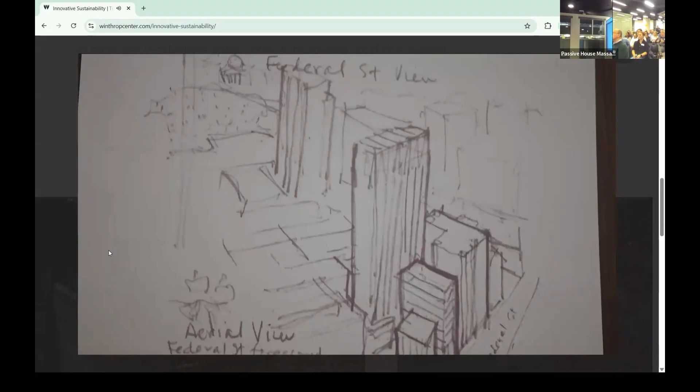Climate change and the global pandemic have made this absolutely imperative. But long before 2020, Millennium Partners was already at work, imagining a new kind of building that would show the world that it was possible to exceed LEED Platinum, to use green energy, and be carbon neutral. We believed the most impactful place to start was to use less energy in the first place. That was our North Star moving forward.

As innovation leaders, we knew it wasn't just the right thing to do. We saw an opportunity to partner with our tenants to help them achieve their own ambitious climate goals in ways that other landlords couldn't. We could provide a literal blueprint for net zero office operations.

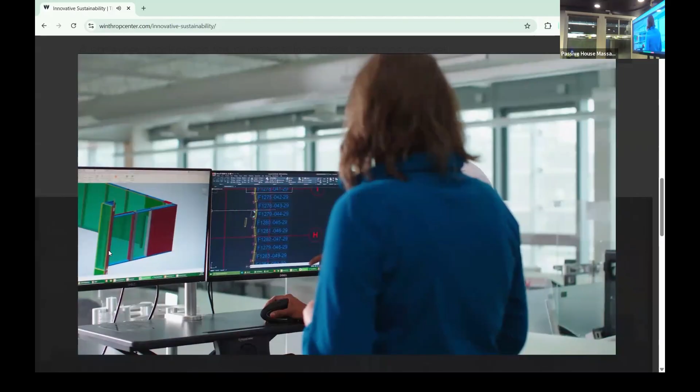The Millennium Partners team went to work. We challenged each other and our partners, including professors at MIT and the global manufacturing sector, to think beyond and deliver a new kind of solution that would be groundbreaking today, yet still innovative 10 years from now.

What rose to the top was the Passive House Standard, a rigorous standard established more than 25 years ago by the Passive House Institute in Darmstadt, Germany, for use in residential homes. The catch? It had not been applied to large office buildings, especially an 800,000 square foot building like Winthrop Center.

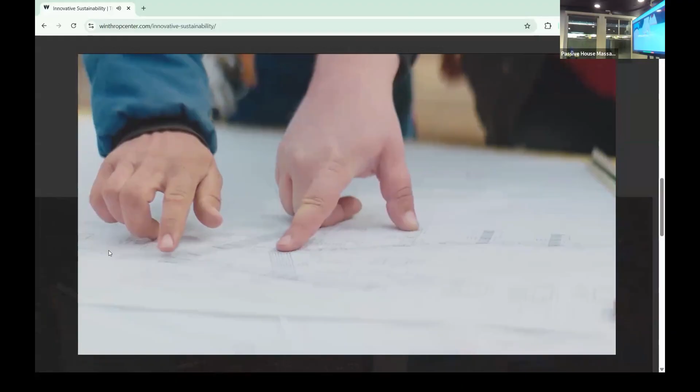After initial skepticism and many meetings, our partners at the Passive House Institute fully and enthusiastically committed to helping us implement the Passive House Standard to achieve the uncompromising performance and dramatic energy savings we were after, to help us become the largest passive house office building on Earth.

Two years into the planning and modeling process, we had our path forward. First, we needed to invent a new kind of curtain wall, one that had never been made. We challenged the industry to deliver an unheard of level of insulation and air tightness.

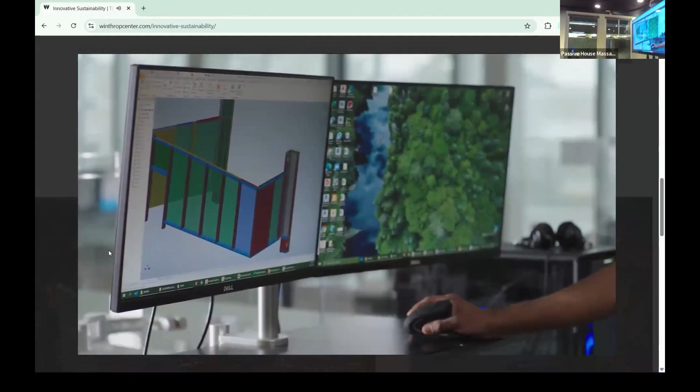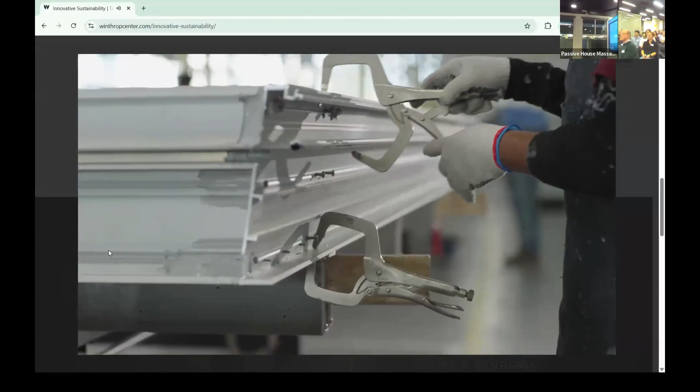The northern Boston climate would make this very difficult. We'd have to eliminate thermal bridging and reimagine the windows using triple glazing. In the end, we created an entirely new curtain wall that could be used by us as well as sustainable buildings of the future to set a new standard of air tightness.

Next, we looked at how Passive House could improve workplace thermal comfort and wellness. Human body heat plays a role in the heating and cooling of the building, as do the individual neighborhoods inherent in our T-shaped design, which can be powered up or down.

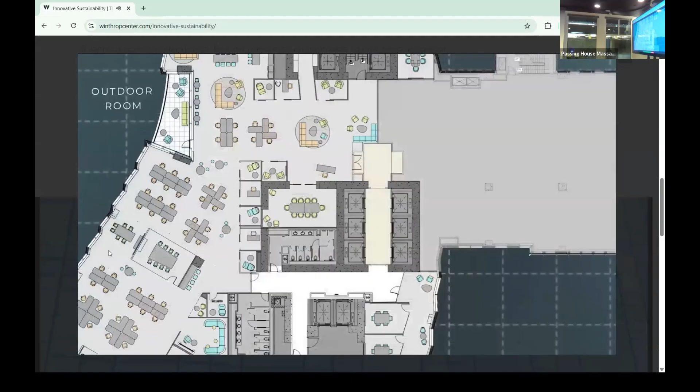We determined that no workstation should be more than 35 feet from a window, and all fresh air outside terraces should be accessible from every floor. For the physical and mental health of Winthrop's inhabitants, we wouldn't compromise.

Winthrop Center's one-of-a-kind passive house ventilation system provides unmatched thermal comfort and energy savings. Unlike typical buildings, this system provides a continuous supply of fresh air, which enhances creativity and productivity, creates a healthier environment, and integrates holistically into the occupants' daily lives.

It's one thing to write articles about it, and it's one thing to teach about it. It's one thing for government to put standards in place, but when people actually start to do this stuff in practice, and we see the model, and we know that it can work, that's what really makes the difference.

You've just shown the whole world that we can do this. A plan, years in the making, from the only company bold and inventive enough to do it.

Winthrop Center has made believers out of everyone, especially city and state leaders eager to forge a new path to a more sustainable future. But particularly with this building and the history of what it meant to add to the downtown skyline, to work your way through many, many years of process, and to be way ahead of the curve in sustainability and ensuring that you've created a monument, an example to the very standards that have since caught up to where this building is.

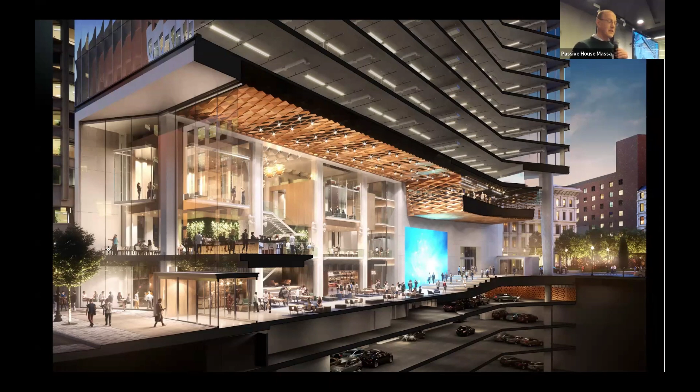This is a cutout, this is a view of the connector from the Federal Street side. And it kind of gives you a vantage point. I don't know, how many people in the room here have been in Winthrop Center?

Okay, well, you know, I was talking to Beth, Alexander, and some of the other board members. One thing we will be doing - I'm sure at some point in this presentation the font I have up here is going to be too small and you're not going to be able to read it. So we will be having a tour or two in the next couple months. If you've been on the tour previously and the building was a little bit under construction, you're welcome to come back, and we hope that everyone will join us.

Another view of the connector with a restaurant on the mezzanine level underneath the Chihuly.

Okay, so a little bit of story time, which I think is part of my number one lesson at Millennium - working on Winthrop Center, delivering Passive House.

2016, we were awarded the project, but it started before then, because it started with some charrettes. Millennium Partners, historically, we have run as a family.

Handel Architects has designed every one of Chris Jeffries' buildings. DeSimone, the same builders. So what that means is Chris, Phil, Rich, Mario, Kathy, Joe, all the partners put their heads together and said, okay, Winthrop Center is a design competition. It's a development competition - we're competing with other developers for this site.

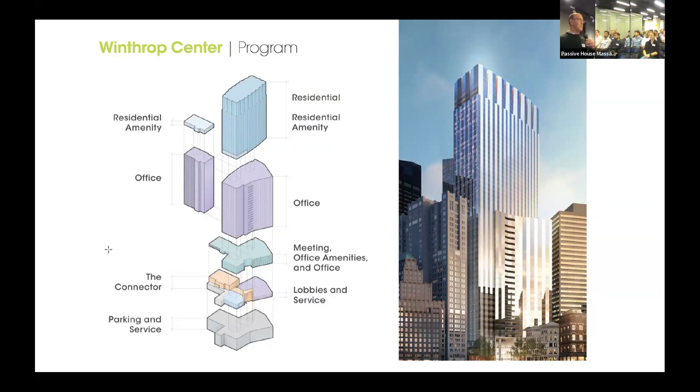So I think there's a little bit of pragmatism in all of this. Striving to create something next generation, but being practical about it. And that's kind of where we found ourselves.

So the trip to Germany for me in that fall of 2018 was eye-opening. Meeting with the founders of the Passive House Institute, meeting with the staff, explaining what we were doing and what we were about. It kind of helped lay a groundwork for the creation of the pilot project, which is the Passive House office at Winthrop Center.

So, new global standard. If you go on our website, we talk about the world's first 5-star office building. I mean, it's good marketing. It sells, and we'll talk a little bit about how it has translated to the users themselves. Because let's remember, what are buildings if not for people, right?

800,000 square feet, we saw that we were going to have 3,000 to 4,000 people coming through that office space every day. So to be able to positively impact those people and convince those tenants that they should come to Winthrop Center, that was our single greatest challenge to start. In addition to all the technical challenges, the building, the teaching, right? The questions you get asked, where's the Passive House specification? Well, it's a performance standard, right? Sure, the specifications have some Passive House elements, but it's embedded and integrated into everything that you do.

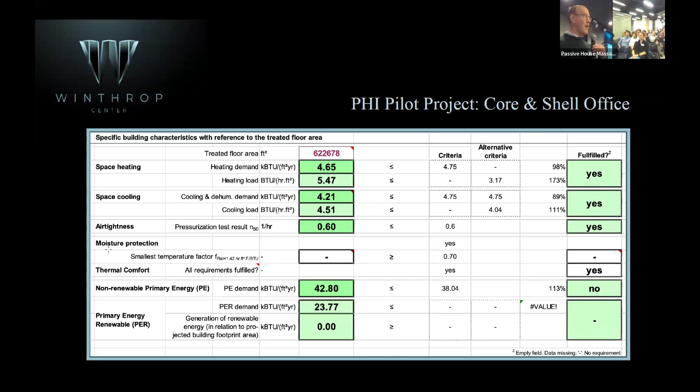So the site is constrained, which creates some logistical challenges for building. And so the solution through a one-year process of design assist with Suffolk, Sotawall, Karas and Karas, Socotec, Vidaris, Handel was a unitized curtain wall system out of Canada. And where we landed through all of that, Spandrel.

R18, the vision glass U value of 0.22.

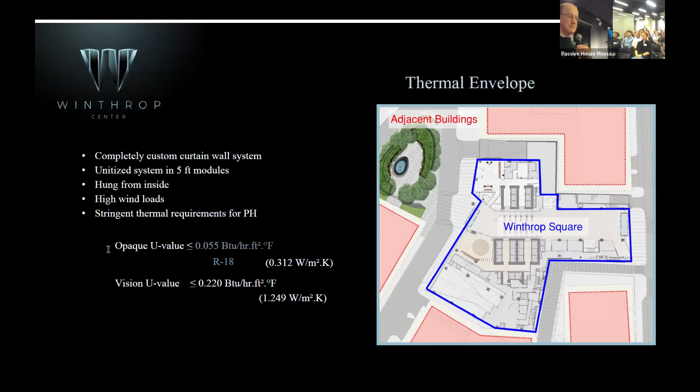Completely hung from the inside, they created a trolley system - I don't think I have any pictures of it in here - that allowed the windows and the window system to be picked from the inside, because crane usage was too valuable to creating the superstructure.

So from a developer's standpoint, getting to the endpoint and delivering schedule is first and foremost much more important and more valuable. So if you can come up with an alternate way of installing the facade, you would do it.

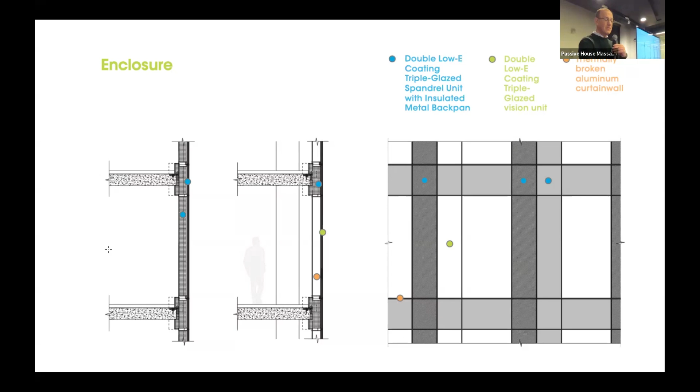So this kind of shows you some of the key points: the thermally broken curtain wall, triple glazing, double Low-E coating on the glazed vision unit, 10-inch deep system. The triple glazing was 3/8, quarter, 2 layers of Low-E coating, argon filled.

You'll see in some of the photos the mineral wool at the head and at the sill.

It's funny. So this project, from a technical standpoint, we ran it really with 3 distinct teams. We had a residential team, and they were fighting for the residential layout. We had an office team who was fighting for the office layout. 5-foot modules, distance from the core to the facade - all of those things were in tension.

Chris Jeffries, the founder of Millennium Partners, when he personally is laying out residential units, which he was on this project because this is a $1.35 billion project, and if he said, I want to make some changes in a residential unit, well, Chris gets to do that. And the rest of us have to figure out a way.

So all of those things were in tension. I mentioned Steve kind of being at the middle of it, and then Scott eventually joining the team and helping us navigate those waters.

The office side, this idea of passive house and vision glass, that was the topic quite a bit. Vision glass - how much vision? And we would throw around numbers, right? Because you model numbers, like 45, 50%.

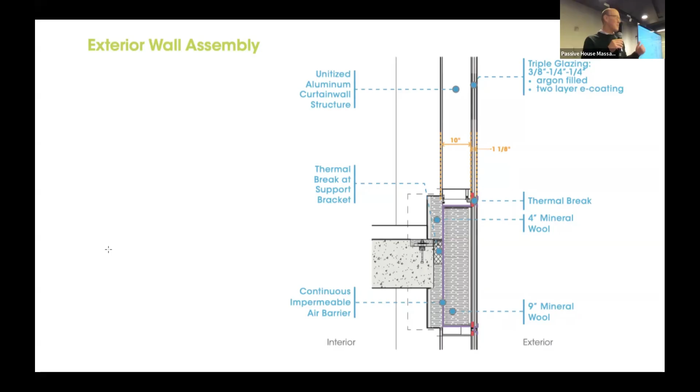But the mid-block site allowed for opportunities to maximize views. And we'll get to that in a second. But one thing I didn't mention...

So this fabricator's up in Canada, and it just reminds me that we tested this curtain wall, and then March of 2020 happened. Well, we're in the middle of building our superstructure, in the middle of testing and fabricating some of our curtain wall north of the border. Well, we know what happened in March of 2020 - border shut down, pandemic hit, and guess what?

We lost our construction financing. $765 million. April 6th, 2020, it was supposed to close. Hey, it's life in the big city.

And so we kind of went back at it in search of financing, and many months later in the fall, it closed. The project changed. The cost of money was different.

So I think when I talk about pragmatism, these are some of the practical things that on the development side that are risks, and we're aware of them. I don't think any of us foresaw a pandemic. But that pandemic created many challenges. Once that financing was in place, we were in it, and we were all about overcoming those challenges collectively.

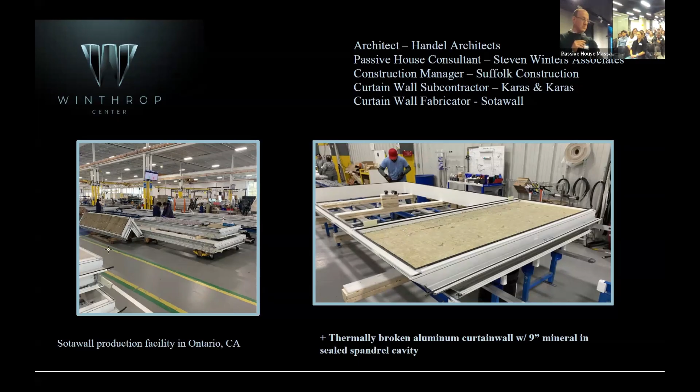So this is a picture of their facility. This gives you a little bit - can you see that on the screen? Yeah, okay - solar heat gain coefficients, U values.

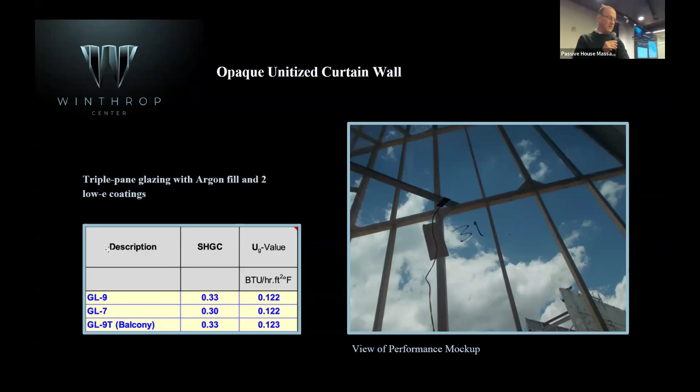That's at balcony. We have a terrace on every office floor. It's a conscious decision that we made because it's overlooking Winthrop Square Park to kind of connect people with nature.

At the head and sill around the entire perimeter, 1,000 feet of perimeter on this project, we have 4-inch thick mineral wool to help us meet our energy targets. We were concerned that would be an issue for tenants, but it actually, in hindsight, hasn't been at all.

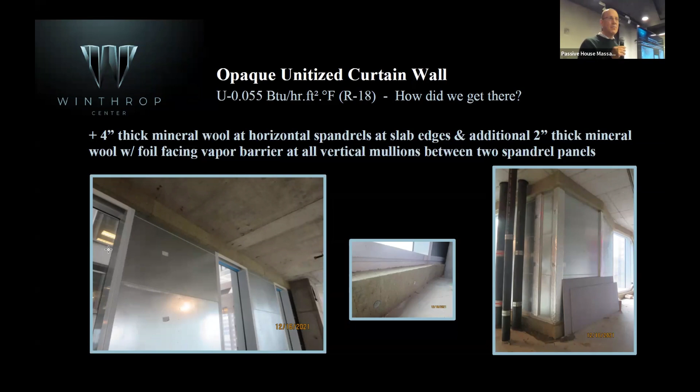You just rock over it, it becomes part of the program. This gives us, here we go, a picture of the trolley on the left, and them hanging the big panel on the right. We were on a 2-week cycle, so every 2 weeks we turn over a floor and move up to the next floor. We have about maybe 20 to 40 panels being hung every day.

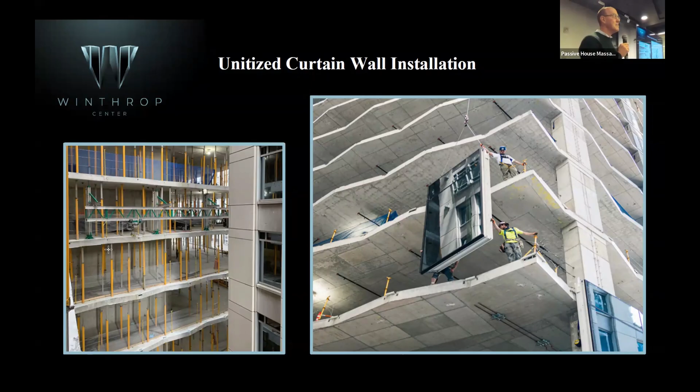So now we get to the testing. The boundary for the Passive House office, the 800,000 square feet, is within the confines of the office itself. So the lowest office floor is the floor, the upmost office floor/mechanical is basically the ceiling, and the facade is the side.

So then we had challenges that we had to review with PHI. We need to build the building, and we have a tower crane smack dab in the middle of our concrete. We have man and material hoists, we have 2 tower cranes, and 2 man and material hoists. So how do you test? How do you seal around those? How often are you testing? So we developed protocols for all of that.

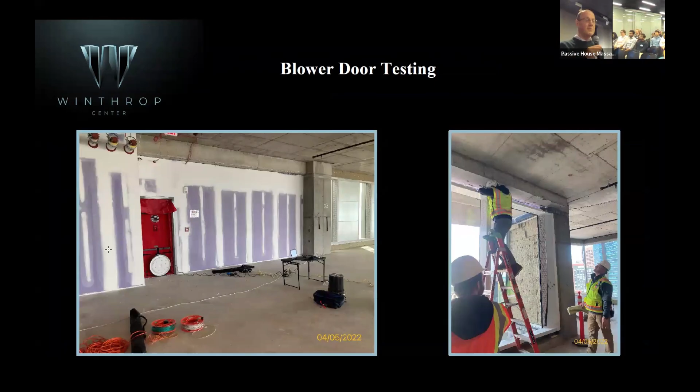So the blower door testing, the picture on the right there, I included because we were testing - it's kind of funny thinking about this. We've been building these buildings for how many years, and only through this are we actually testing the building. It's just something that hasn't been part of it - many of you have been doing it for years, but for these large buildings, we haven't.

This was our first experience doing it. The image on the right shows we were having trouble on one of the floors finding why we weren't meeting our air leakage requirements. It was right there in that location - basically the head there, on the other side is the terrace, okay?

And so you all know this, but quality control, it's key. We've always been very good about having a clerk of the works on our projects - basically an extra arm for Millennium Partners, an extra set of eyes and ears. Actually, we ended up hiring that clerk, and she's now one of the chief engineers on the project. She's excellent.

Okay, so this was something that - the city asked that the project be LEED Platinum. That was one of the criteria. They asked for an observatory, they asked for an iconic 600-foot tall building, and so we gave them LEED Platinum, we gave them Passive House, we gave them WELL certification.

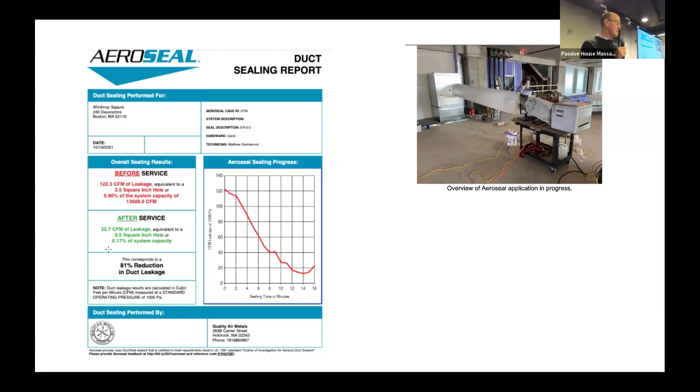This was new to us, but it makes perfect sense to me. You know, AeroSeal - we did AeroSeal on all the vertical, both the fresh air as well as the extract. I don't know why you wouldn't do it, having gone through it. It's just part of the overall process, helps with the energy. There is a little bit of schedule that you have to take into account.

Fall of 2023, when we finally received the certification - those videos where Mayor Wu was talking, that was from the Passive House certification celebration. Thank you, Hank, for handing Chris the certificate there.

I remember distinctly - here's the story. We decided we were going to have a celebration to celebrate the Passive House certification. And I said, okay, when are we doing this? That's like 3 weeks out. Guys, we don't have the certification yet. Nothing like a party to force something.

And that was true. I was on the orange line coming into the city when I received an email from PHI with a certificate. I was shocked at the flood of emotion that overcame me because it had been many years. We had been through the pandemic, and we had been through some challenges over the shadow law, which I'm not going to get into.

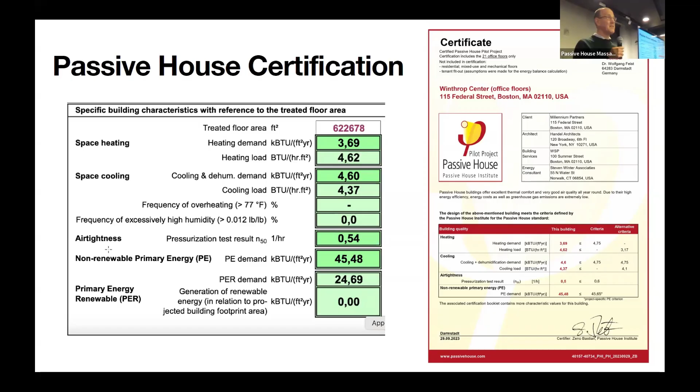And technically, from a technical standpoint, this project is many different projects within one.

So what does a Passive House project like this cost? When I first started this exploratory, I was at a Mass Building Congress event, and one of the construction managers working on a Passive House project told the room, a couple hundred people, yeah, Passive House project costs about 6 to 10% more. And I thought, oh boy, we're in trouble. We're not going to be taking off if we're at 6 to 10%.

Fortunately, my background within construction management allowed me to break it down into its parts and pieces. And what we found is that if you look at the envelope, if you look at the specific pieces, specific parts, it's 2 to 3%. So $15 million, call it, on the office portion, $400 million, $400 million. You all in this room know that it's the envelope, it's the design assist, the additional insulation, the testing, the certification, the modeling.

But that was an easy one to say yes to, given the potential benefits, because we firmly believed in this - so much so that the president of the company, this is back in early 2018 through 2019, the president and I worked on a digital library for Millennium Partners. It was all the research that underpinned everything that we were going to put into this project. It was 4 binders.

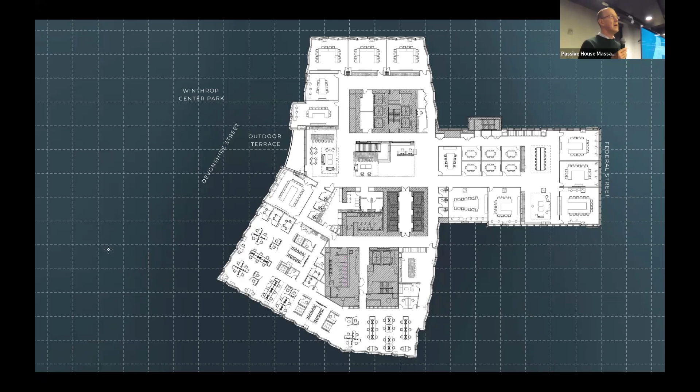And it was kind of through that back and forth that we learned that sometimes telling your story in an honest way, tenants can appreciate that in a way that they can then tell their employees and make their employees feel good about working at a place like Winthrop Center.

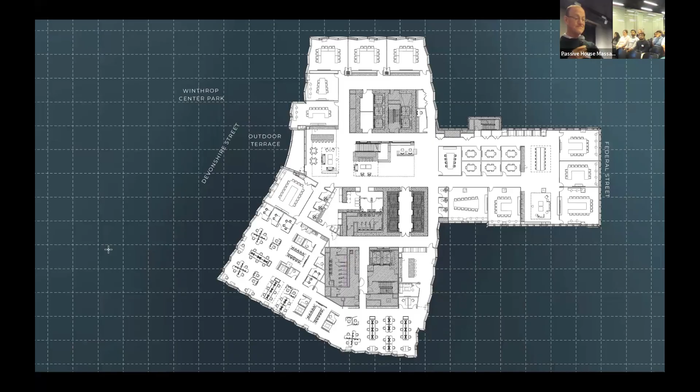This was an earlier slide that we had created for tenants to help them understand everything that Winthrop offered. We could spend a couple hours talking about Winthrop Center. We had quite a diverse array of efforts on this project.

So thank you all very much. I thank you all for your support through the years, because there's been a lot of cheerleaders, and I think that's important. Development here in Boston is kind of slow, to say the least, but I think we all cheer each other on, and times like these we need that. So thank you all, and Alexander, if we have questions, we can certainly take them.

All right, let's start with one from the room.

Mr. Keaton: Thank you, Brad. I'm really interested in understanding how you went through the tenant fit-out and passed on the Passive House requirements to tenants who are used to bringing in their own team for tenant fit-out. You didn't speak to that at all, and it couldn't have been easy.

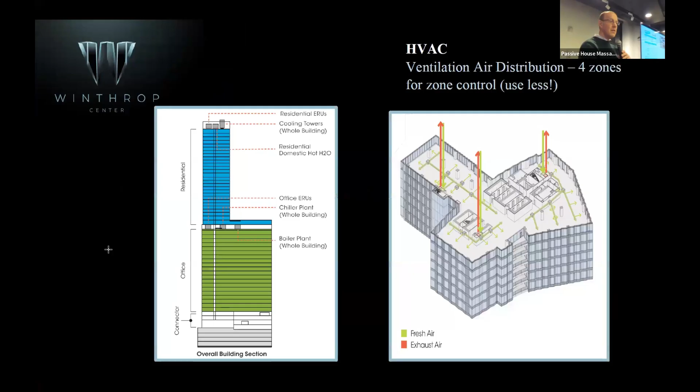Great question. So let me go back to our floor plan. Okay, so here, let's see. Only internally do we talk about vision area. That's what I would say.

I have not heard a tenant complain. Tenants come into the space and they are thrilled, really really happy. What we did is we maximized our views - the front face along Devonshire, and then along Federal Street. These spaces here, you have buildings, they get wonderful light. Our floor to floor, floor to underside is 12 feet, so even with an 8-foot by 5-foot piece of glass, it allows a lot of natural light.

Great, thank you. We're going to take some questions from the internet now.

Was the project given lower exterior wall R values than what we see with our standard passive house multifamily buildings? It was not given any specific value; all passive house buildings were designed to a performance standard, and we were trying to reduce our energy as much as possible. At the time we designed this, our facade was 2 times better than code, which is not insignificant.